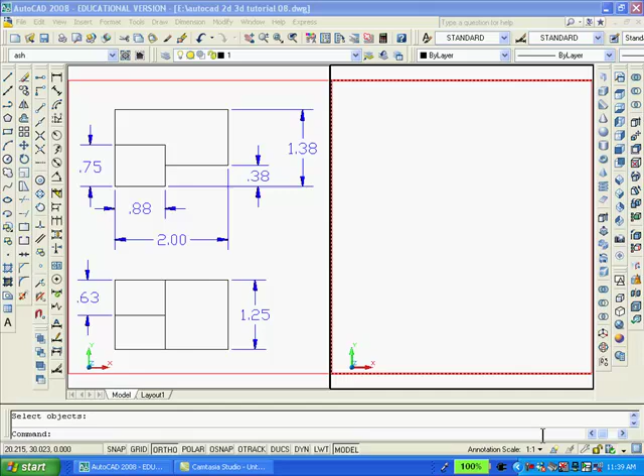And now, while in Model Space, I'll divide the screen into two viewports. At this time, I'll create the 2D drawing. I'll pick a point at the top of the screen with Ortho on and draw a line 2 inches. Enter. Move the mouse down, type 1, enter. To the left, type 1.12. Down, type 0.38.

To the left, 0.88. Up, 0.75. To the left, to the right, 0.88. And then with the object snap set at intersection, I'll finish that portion. Now with the fillet command with radius set to 0, I'll complete the top view.

To create the bottom view, I'm going to copy these 3 lines and move them down. Now with the offset command set at 1.25, I'll offset that line down there. And with the fillet radius set at 0, I'll finish off the 2 intersections.

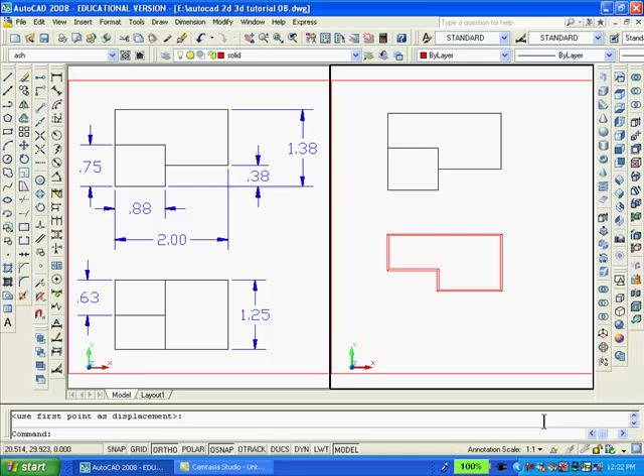Next, I'm going to use the polyline command and trace over the polygon in the top view and move it down. Next, I'm going to trace over the rectangle with a polyline and move that down too. Before extruding the parts, I'm going to move into the southeast isometric view.

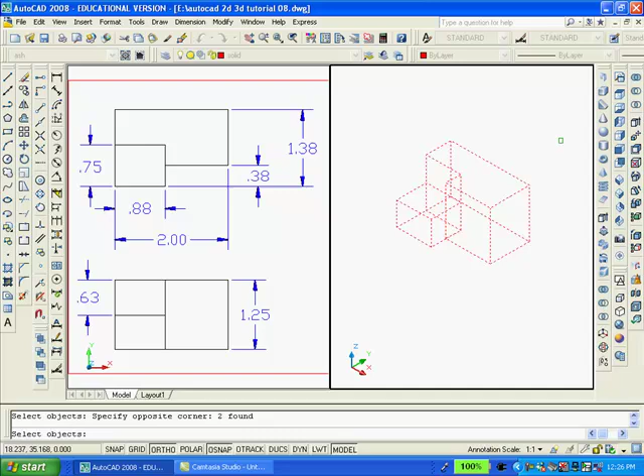Now I'm going to extrude the red polygon a distance of 1.25 and then extrude the small rectangle a distance of 0.63. Now with the move command, I'll put the two pieces together. And then with the AutoCAD Union command, I'll join both parts to create one. And using the Visual Styles button, add a little shading to the drawing.

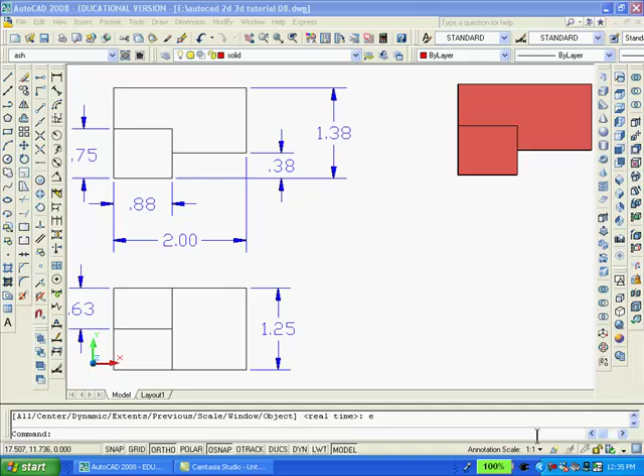And now I'll change back into one view to see what we have accomplished. And then I moved into the top or plan view so that we could see everything together. Having finished the 3D solid model and dimensioning of the object, I want to get back to Paperspace to view the drawings properly and make the drawing ready for printing, so I'll click on the Layout 1 button. As you can see, my template rectangles are still there.

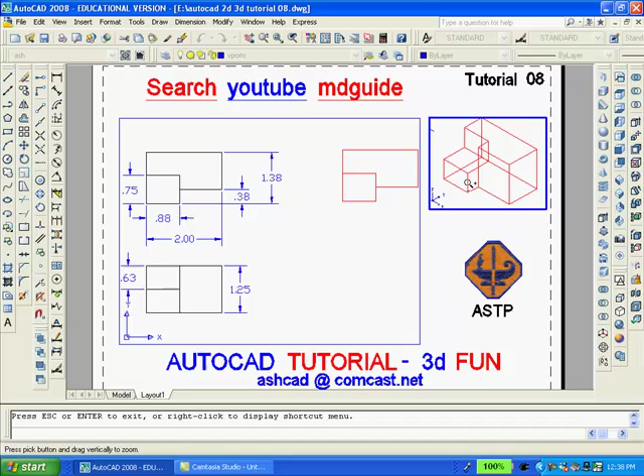Now to create the two viewports, I'll type MView, enter, and select two diagonal intersections to create the larger and smaller viewports. I'll double-click inside the smaller viewport, switch to Southeast Isometric View, then pan and zoom to enlarge the solid model. And to get back to Paperspace, double-click outside the small viewport.

You must remember that when using Paperspace, the entire drawing should be printed at a scale of 1:1, even though individual viewports can be set to different scales. You can set the scale of the large viewport by selecting it and clicking the Properties button. And then going down to Miscellaneous Standard Scale and select the scale that you want for the viewport, in this case 1:1.

Once the scale is set, you want to double-click inside the large viewport to gain access, and then pan so that only the 2D drawing is visible. To accomplish this, it is sometimes necessary to move the solid. Now double-click outside the large viewport to get back into Paperspace again. Finally, if we don't want the large and small rectangles to show or be printed, we can go to the Layer dialog box and freeze the viewports layer. The drawing is now complete.